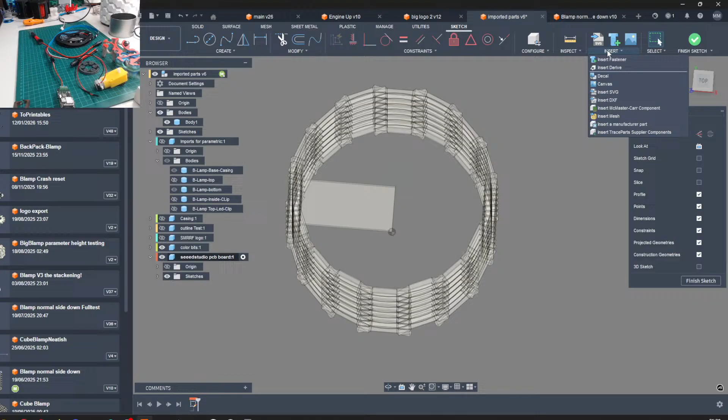Alright, I'm also trying to do multicolor here, so we can also work on that one. But for now, I want that one, insert, color bits off, body one off, insert canvas, insert from computer.

Where's the picture? I really need to order this. There we go, open. Cool, alright, there we have that one. Let's see - sorry, chat was gone. Alright, so we got the picture.

Let's measure it up with the millimeter and just roughly write it out. Perfect 25 - oh, I love when those numbers are great. Okay, so we have a sketch.

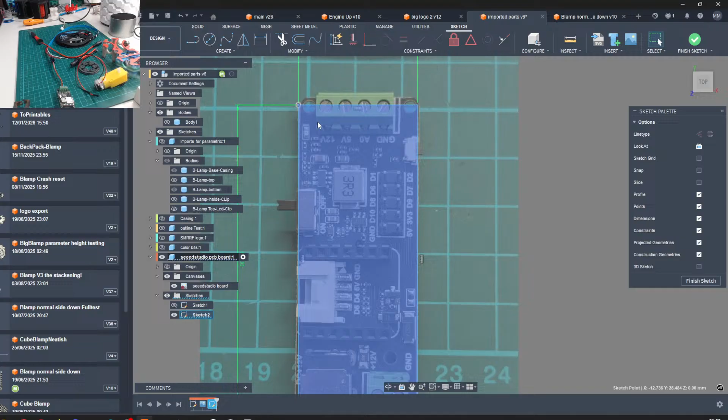And this is 5. Five on the right, so this one and this one needs to be 5, because there's a small spacing there, so measure that one out.

So at least we got this one working, so we do 1mm thickness. Oh, it's 1.6, not 1mm. Okay, 1.6.

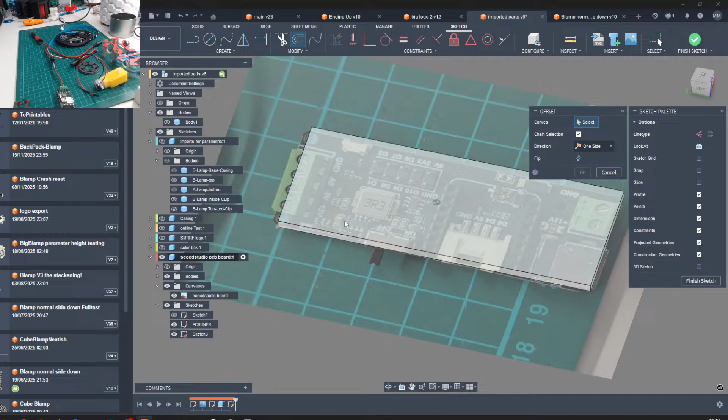PCB. Oh, my tab was on. Okay, why can I select that one and not that one? Wait, I said project, not offset. Whoop. Hello?

There we go. That's number 1. Cool. Next one, that is kind of what I want. Small button.

Because that's the reset. So that is 478, 4.78, and the thickness plus minus 355, 3.55. Then 8.22, .22.

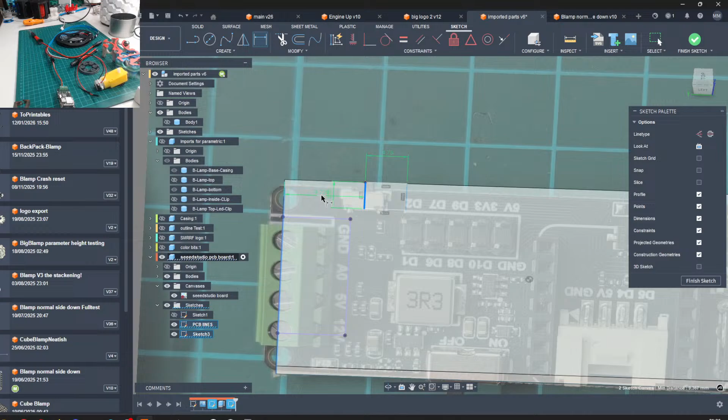Gonna check the height. 1936. 1936. And it feels correct. There we go.

Height we'll do later. Then this one gets a cutout, so for this and this, and then the top here, oh, that's the other chip. I forgot to take the other chip. Oh, and I forgot my camera. Beep. Sorry.

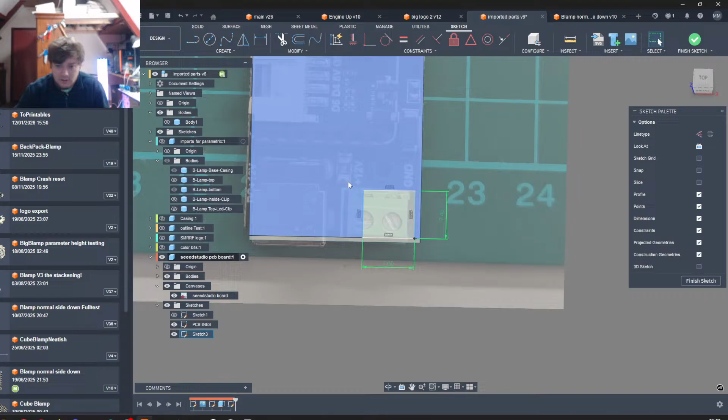Literal distance off the wall. 2. All right. Ten point one, 10.1, and the height of this whole block is 11.6. Oh, I love rounded numbers. 11.6. And now we just need 2.09, 2.09.

Cool. That's the important bits that I just want, so I know I can model around there. So that's the part I want there. That's the part I want there. Right? Yes, yes, yes, yes, yes. Oh, there we go. All right.

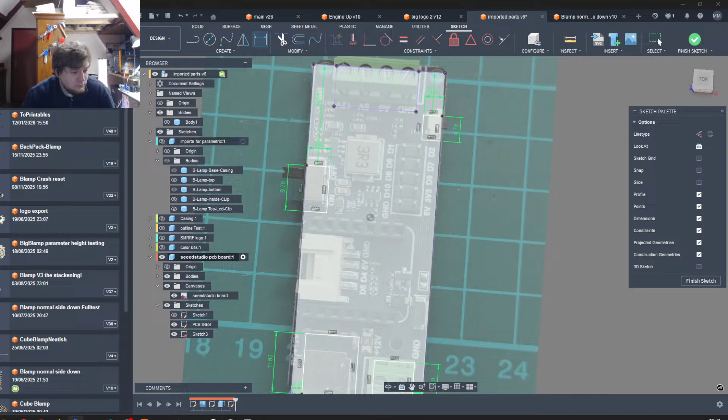All right, height. Eight point seven. Why are you freezing? Just press escape. 8.7. Back.

That doesn't have a flat surface there, so let's check here. Yep, that's better. .4, 4.47. Check this over there. This is the same as that one. This one is slightly different. So let's cross that one out. .12.

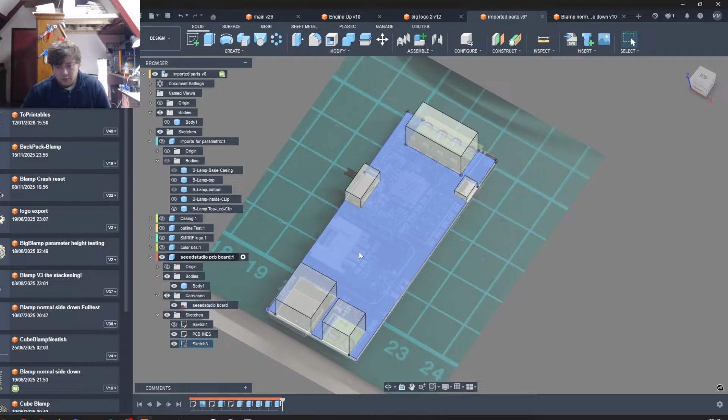Alright, so now we have 18,112. Wrong one. 18.12. And the height with this thing is 18.2.

But that's a square. Oh, that completely didn't feel like a square. That did not feel square at all. But it's a square, like it's both 18.2, 18.2. I did not bloody expect that one. I did not expect that one.

14.3, 14.3. Cool, now the thickness of this. 2.4. So offset, no selection please, minus 2.4. And offset minus 2.4.

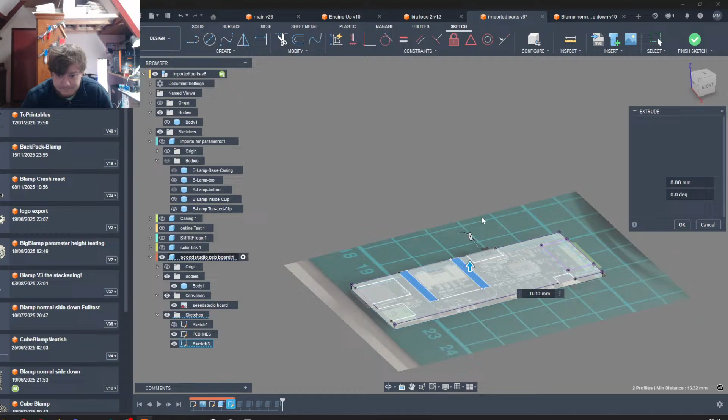Now we have that one. What's the height of these? 5.3. Cool. So this is the thing I need to put in, and I need the other chip on top. So the normal chip, which is this one, I need to unscrew it again. And I hope everyone is having a good day there.

Alright, so now we're gonna make the PC 60 board. Breakout board. Alright, yeah, it is a square. I really didn't think it was a square. Like, holy crap.

17 by 20. Wait. 17 by 21. Okay. Sketch this one, this one. And then 17 by 21.

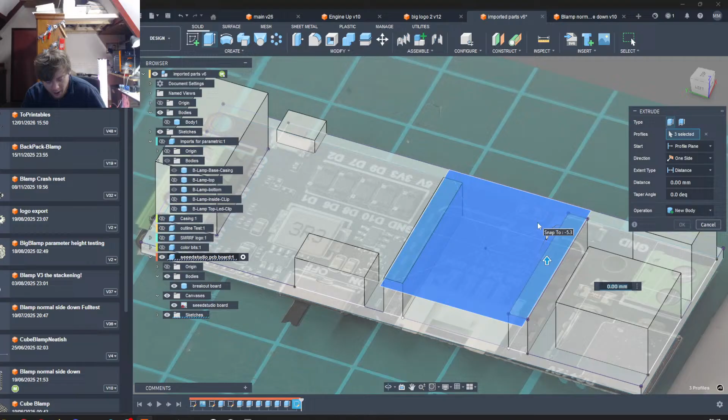6.3, 6.3. Yeah. At least we have a rough out. 7.3 from this point.

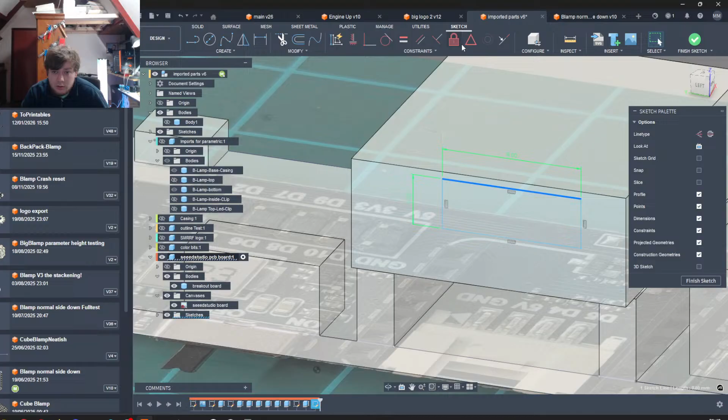Okay, now it needs to be 7, because then we can do this sketch here and make a small PCB stick out there. 9 in the center. Nine by thickness 3.2, 3.2. And then we can do this one to this one. There we go. Now we have 1.6.

Now this is the board we need, so that is good. And there we go. Alright, so we got that one in place, then we need the bottom.

We got the thing, so we can make there we go. Bottom new chip. Bottom new chip. We can do create a copy. Yeah, right, we need to line it up. Yeah, I fucked up there. Yeah, I shot it.

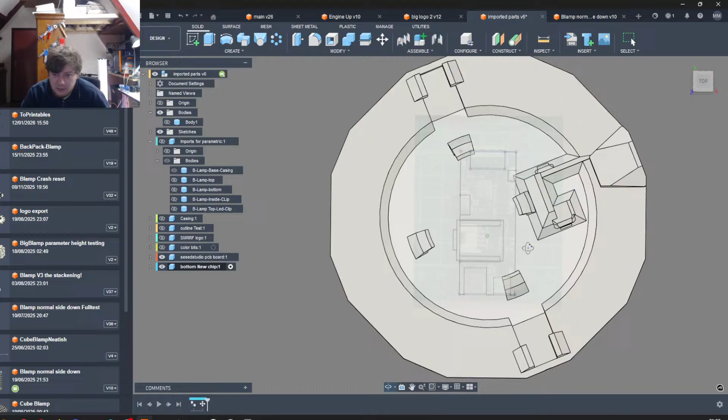Oh, right, we don't have to line it up, so it just needs to fit in here. Okay, I'm happy about that one. So I think I can make this thinner, but at the same time, I don't want to.

Alright, so first off, we're gonna clean this one up because this all here is not needed. I want to keep those 3, I will move them around, because then you can wrap the cables a little bit on the inside so it doesn't get stuck on the outside when you click it in. This is good, this is good, this is bad. So that can be gone completely. We're gonna redesign that, and with that we can adjust the top part too.

So hopefully the, right. Touch cable, and I will just measure that one up. So let's first make that one. Okay, where's that cable? Where's the cable? Not that one, this one. Because I still need to model this thing. I forgot that one.

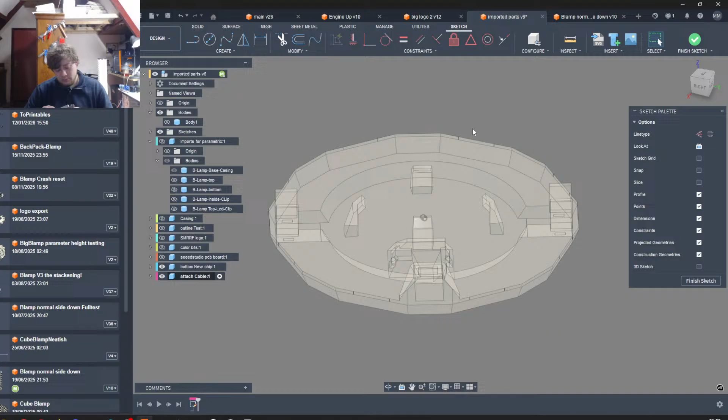So, okay, that's 11. You need to be, hey, hello, I said D. 11. And then how far are we going? 6.3 or 8.3.

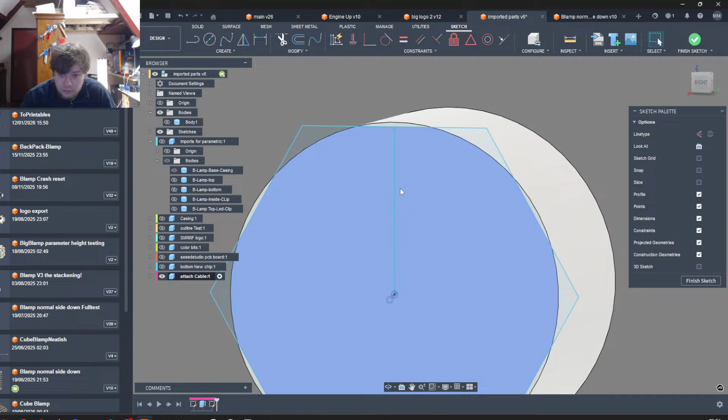Should be fine, we'll line it up when we need it. So that one, sketch here. 10.7. I don't think I have this one in shortcut, so I'll put it on. That should be correct. Yeah, that's yes. That's looking correct.

There we go. And that is going for 9.24, 9.24. Let's double check that I made it one body. Okay, yep.

Power input. Cold. Alright, there we go. That's the important part, the rest can be smaller. I'm not really happy that this doesn't really have much attachment. Yeah. Crap, so I need to lock it here and in the front, because this is not enough that it can be pulled out.

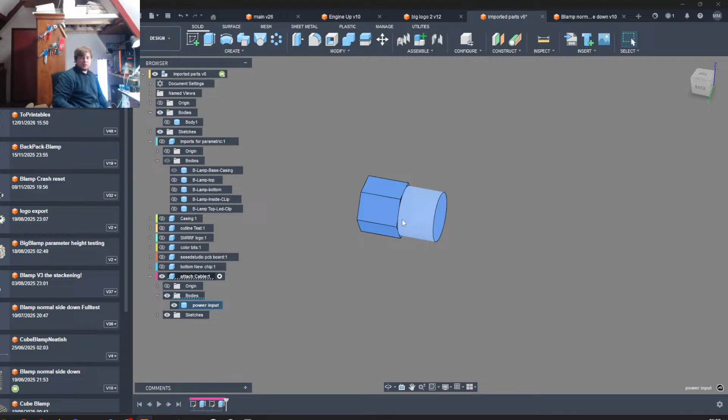Cool, at least that one is working. Yeah, I screwed up. Well, technically I screwed up, but like the point of the attachment is not that correct. So I need to look for something else, but for temporary I can use this. That should be fine, I just don't know how to hold it.

You need to make this so bloody tight. Okay. Okay, so we're gonna do that and that. So let's go for this. 2.9, and then it goes to 7.8. 2.8. And then it goes a little bit smaller.

Plus minus is correct. 8.2, okay, this is good enough. Then we need another 12. 12. This is the important part that we need to enclose.

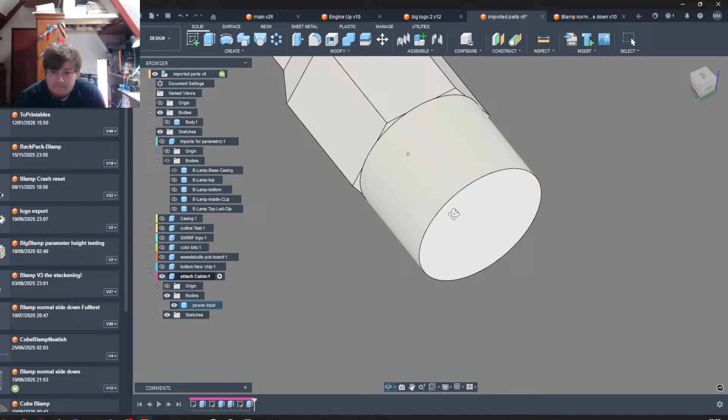This is way too big somehow. But we're getting there, we're getting there. Okay, so now we can get that one back. We can go now into jumping that one. We can disable that one and start cleaning this one up. Okay, how can I make a click system with something that can go back and that can go out again when it's stuck?

Yeah, I didn't think about this properly. Like, it's too small, there's no surface. Like, if you put something in, you pull it out, this whole thing just goes with it. There's no way to fix that without screws, and I don't want to implant screws because then you need to buy 2 screws, which...

Oh. Damn it, okay, I need to leave that and focus on the chip itself, so I'm gonna leave that one as placeholder, but this all needs to be gone. So let's start cleaning up. So this one, then we need to press this one, this one.

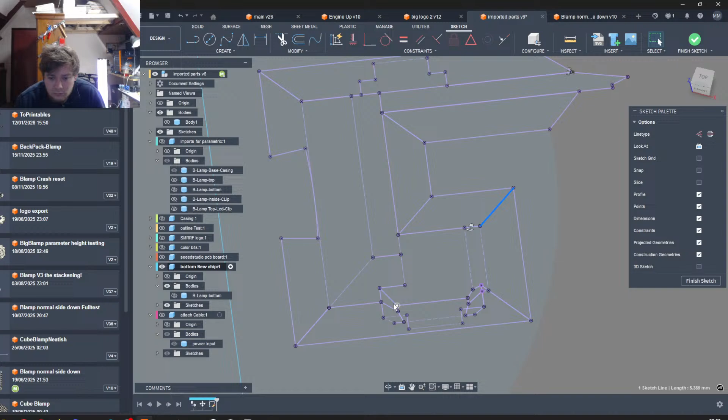The body for now so we can click things easier. Okay, so let's get the body there. Right. There we go. Now, come on. That's fine, that's fine, okay, that should be fine. Cool, okay, yeah, nope.

Get the body back. There's at least half of it going. That one.

Okay, this one needs to be deleted. Like it said, but it should be okay.

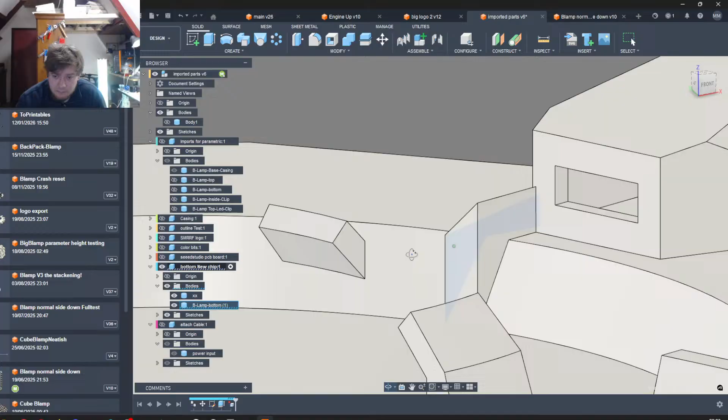Better, and you can be gone, because then we can bring the chip back to this.

Okay, so this one needs to be tightly centered, and then the cable sticks out there, plus minus. So the power cable will sit here. It can be a very short one, or we do a long roundabout. So I think this is better over here, because then you can do the cable okay, there.

Okay, so that's that one. Then we have attach cable. And then we have this one. See, this is

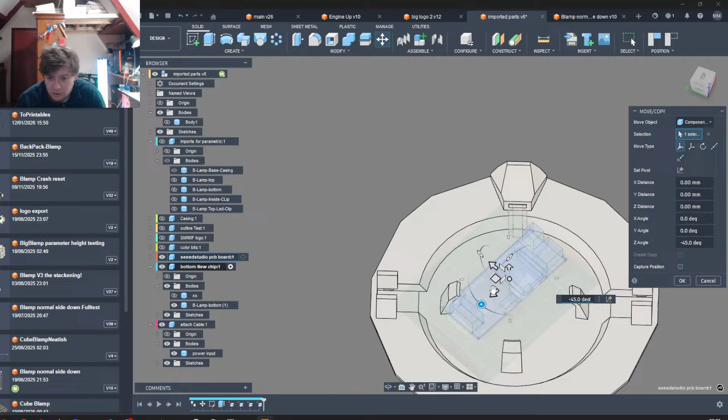okay, so this is why I make the studio put the modeling parts, because then we can actually turn things around, make it workable. So we can put this one dead center.

Cables go out here, the LED strip cables. Power cables go here, so we can go around. Otherwise, you need to go a little bit short in here and then just go over it. That gives it a little bit more space, because then that one.

Okay, so this one can be angled like that. Oh, that's neat.

Okay, so we have that one attached. This one. Attach cable go in here. So you.

Okay, so this one sticks out here. That one can be inverted into.

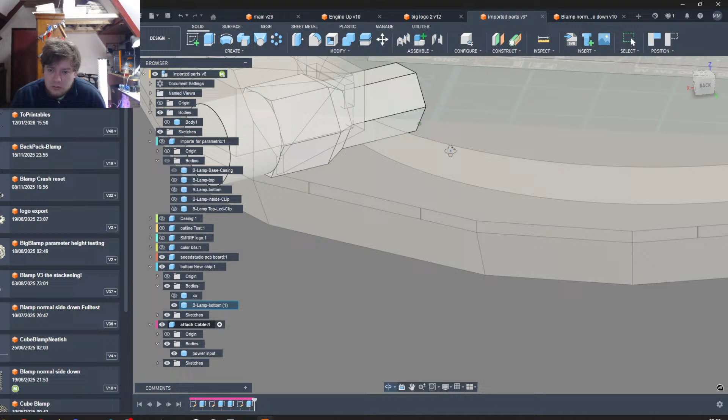If it is this thing and I get a new one that is slightly a different situation, but it's the same thickness, I can put it a little bit lower. And then I have less modifications on the top, and I can make an insert clip that you put in here that hopefully clamps it in place.

Yeah, I think I can work with that. Let's make it, modify it.

Okay, so first of all, let's get back to the bottom chip. Make a sketch on

capture position, please. Let's put that one on the top. Alright, so get to the bottom chip. I want to have a sketch here, and that I can at least see this one and this one.

Because that's the clip space, so we can make an attachment. So first you clip it in, then you put the clip. So if

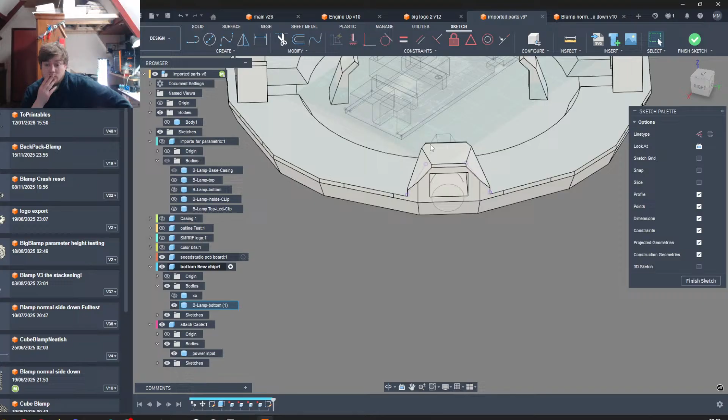Yeah, okay. I can focus on this one later, but first this one. Okay, you can go down, grab, Seeed Studio board, and the casing can go off.

And let's move you a lot down, so this one. .6 down, okay. Negative 6.5. 6.

Oh, that seats nicely low indeed, so I can move that a little bit that direction. Okay. It is nice and low, not in the cables of the connection pieces for the LED strip, so I dig that.

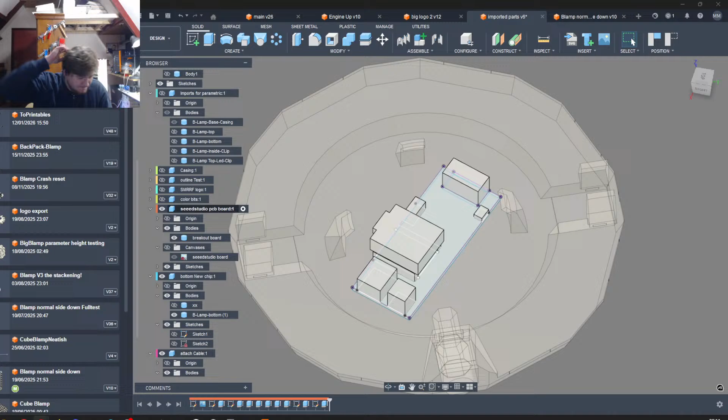Let's do that. So this is really small, of course. This is too small, I cannot measure that. I can measure this.

Two. Okay, there are 2 holes over there and over there, so I can go to chip. Okay. Capture precision points. And then project just the outlines, please.

Oh, and we can do a small prototype for the lining up, because I want to use those small holes here for the center alignment. So you can click it in, then put a plastic piece on top, which puts this one on.

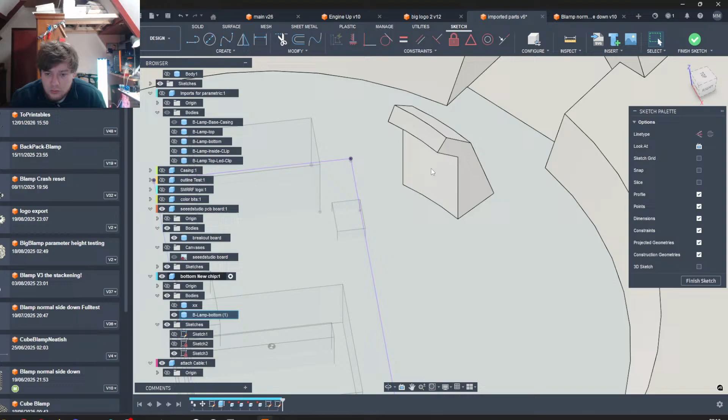Okay, I need to move this one. Cancel, I'm not in a sketch, finish sketch. Not the best way to do it, but yeah. Okay, works, nice.

Okay, I'll at least have space here to do that. And we still have cables, we have cables, cable space sticking out, so that should be good.

We have the reset button over there, which we can reach, the power button there, so I can make a small clip here that attaches it, and ooh, I do not want to touch that one.

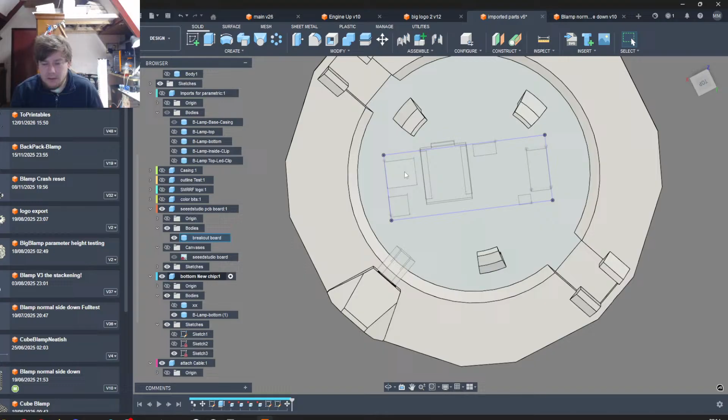Yeah. Okay, let's get the holes there. So 2.

But oh, here's the hardest part. Okay, I need to. Okay, that is 1 by 1. So this one.

This one, one by one.

Oh, right, it's rounded off. Should be fine, right? Yeah, okay, should be fine.

So small pins, and then the same here. That is easy, copyable like that. So we're just gonna do a quick sketch of this one. Mirror, select line, go.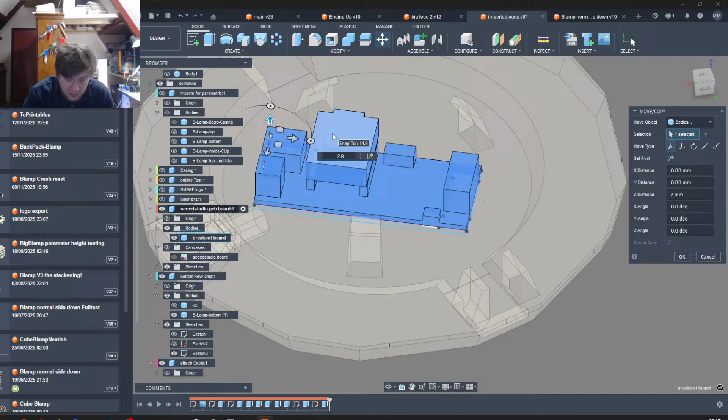Point 8. We have some small soldering pins in here which I almost didn't include in the sketch because I didn't think about that one. But now we have that spacing at least, we get that one.

That gives the freedom, so if we get this one somehow in place, that's the same length. 4.15.

And the CCU board can go off for now. Let me go to the bottom clip again. Go into this one. And this 2. Oh, this is gonna be hell.

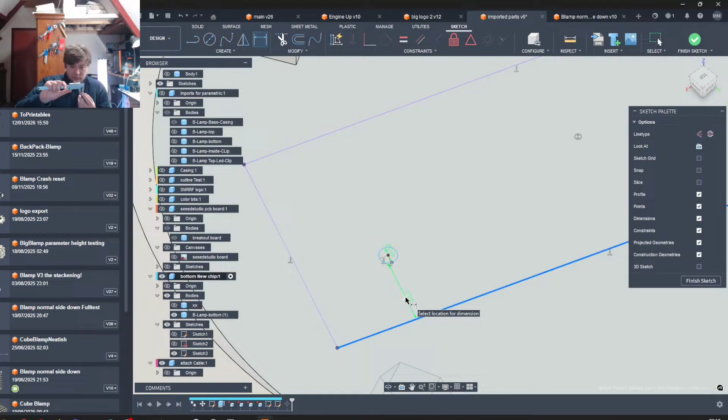Okay, you and you, double check. 4.2. Nope, 4.2.

And then 9.5. And if we get the Seeed Studio one back, feels okay. Okay.

Cool, okay, then the big circle is there and there. So how much is this? This is 0.9, okay. So you have an offset of 0.9.

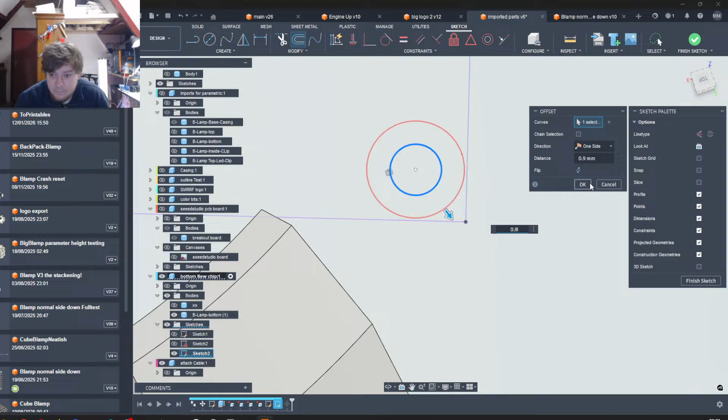So let's make a quick one, so this one, this one. Let's see how much height do we want, aiming it. 4.5, not 5.5, thank you.

Oh, right. Yeah, let's make it new for now. Let's get the sketch back. Tree on the bottom needs to be gone. Minus 1, join.

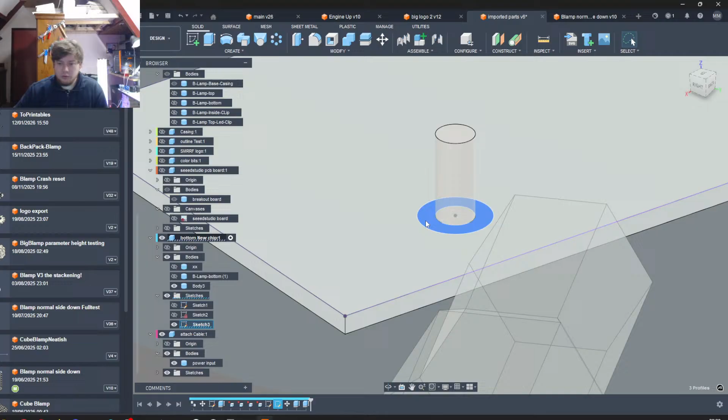Okay, so this was plus minus, let's get it out. 2.2, so 2.1. So this is where you put it in, at least. That's the thing I want, so.

Let's start up the printer, and I need to swap plastic for that. Do I have leftover plastic I can use? Yes, right. So let's do unload, because this small leftover is probably enough, but I don't want to use it. So let's unload that one. There we go.

Test plastic. Come on, go in. There we go.

All right, let's see how we get that one in place. Okay, waiting on the temperature. We can go back to the model. I don't want to do the whole thing yet, or do I want that? I have 3 boards that I can test it with, so if all this connects up, that is fine.

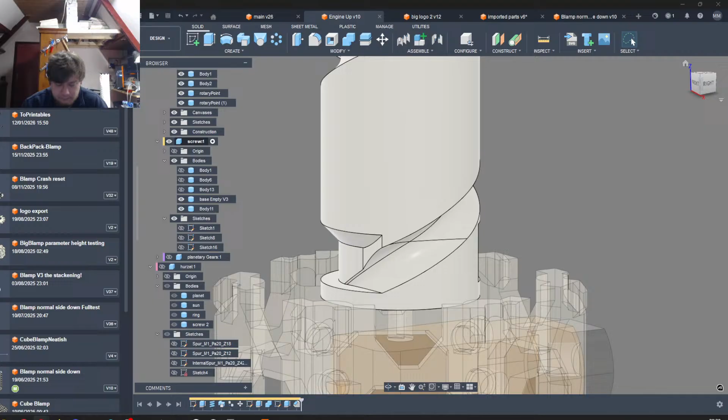Too much, because this is just too heavy. This one and this one is 7 millimeters distance, and I want around 12.

So this is gonna be a different one. Okay, let's do, you gone, and you will be gone too. Because this needs to be there, and this part needs to go. Oh, I can do that. Okay, now I have a good understanding what to do.

So you, I know chamfer's gonna chamfer. Are gonna be 11. And then you are also stuck there, which is fine.

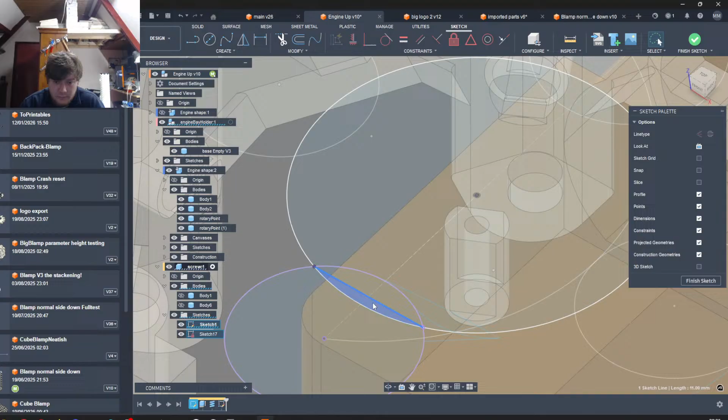You still need to be there. You can be gone. Then we can do that small curve. Okay, I don't want to, so the marble spacing is here. This is too much, so I can go a lot closer. So bringing this sketch in.

Let's make this 6, because then we just make it a lot smaller. Fuck yeah! And then we do this cutout. Right.

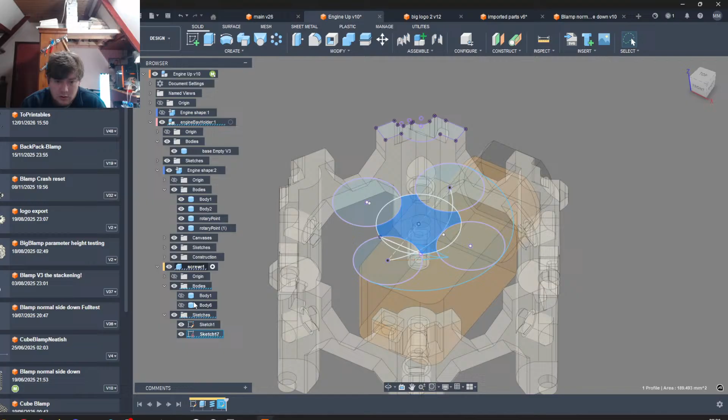No, screwing up here. Yeah, that is fine. So this goes up by that one. Then we say sweep, select path, select guide surface.

Huh? The fuck? That's not what it should be. I'm confused.

There's a little bit weird, it's not doing the shroud. It's just... so I think I need to do it like this and then cut it out, but that was confusing. So get that one, select guide surface, select.

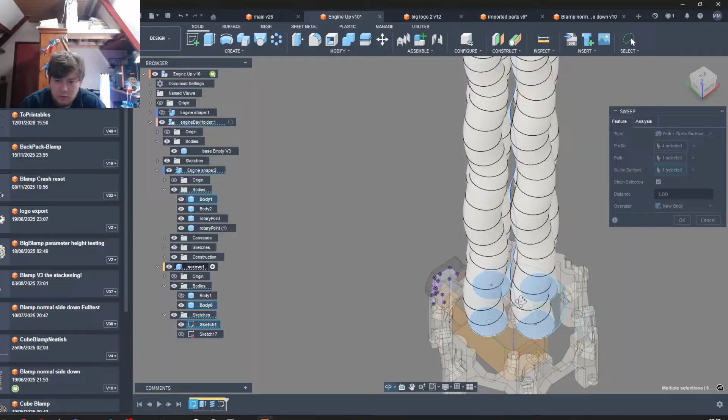What? I'm so confused. I screwed up, I should not have deleted that, huh? Okay, this should go around.

That's even weirder. Yeah, like there's also a small cutout here, which is that one. That's fine. Okay, the last time I did this, it rolled around like doing actually that. So I'm...

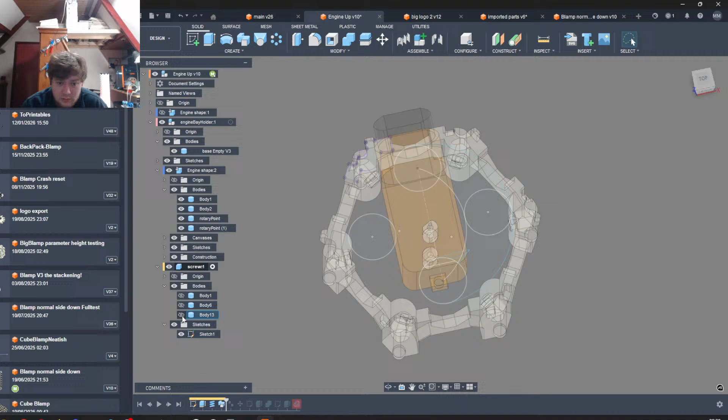Okay, well, I was like, oh, we can fix this, but somehow. See, this is what it should be. So, what did I fuck up here?

Path and guide surface. Is it literally just... is it maybe because I selected that flat plane and that plane is not flat? Oh, I'm... okay, that's the only thing I can find.

Nope, okay, finish sketch. Alright, you...

How's your day going, man?

Yeah, like, is it the distance? It should not be distance related, right? It should not be distance related. It should definitely not be distance related. So finish sketch, we have to screw.

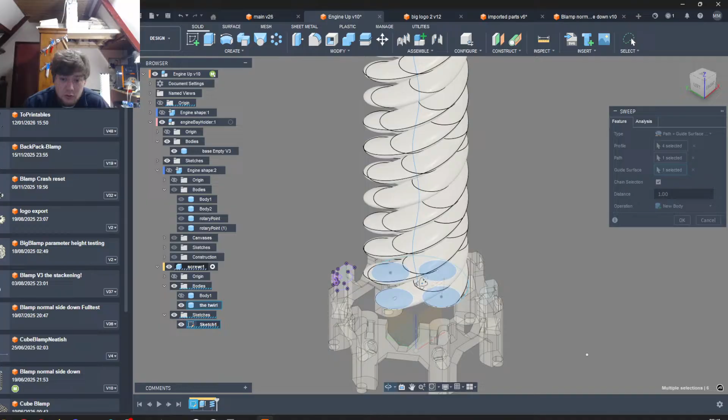Control, let's see. Alright, so sweep, select, and then guide surface. Okay, so, oh wow, okay, so we grab the surface plane and then it's fine.

I thought that, so the engine shape, this is flat too. So it really depends what you select. I thought it's the same surface space. It's flat, and that small thing is flat too, but different.

But okay, so this one makes it go correct. Right, so if this one works, then we can cancel this one and just do that. So we can go here.

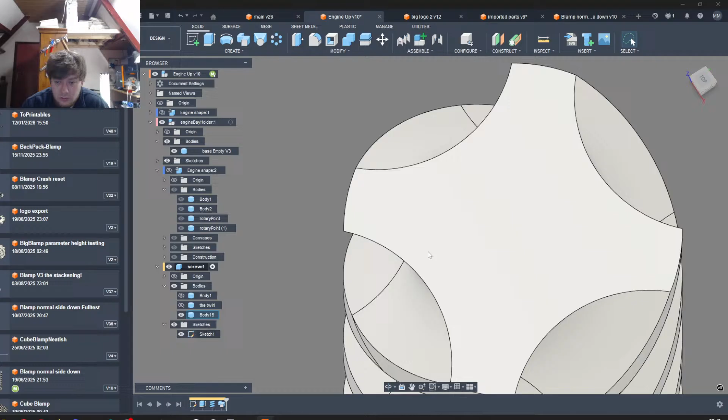One, two, three, I don't need 4. I need 3, god damn it. Okay. 3, please. Oh, is this still centered? Still centered, okay, yeah, still centered. Okay, cool.

Because there are 3 places where the ball can go in, and there are 3 places where the ball can go out. So this shape should be fine, and print is done.

Oh, that looks so tiny. Let's cool it down, because the small template I printed is not allowed to warp. But yeah.

Oh. We made a small mistake here.

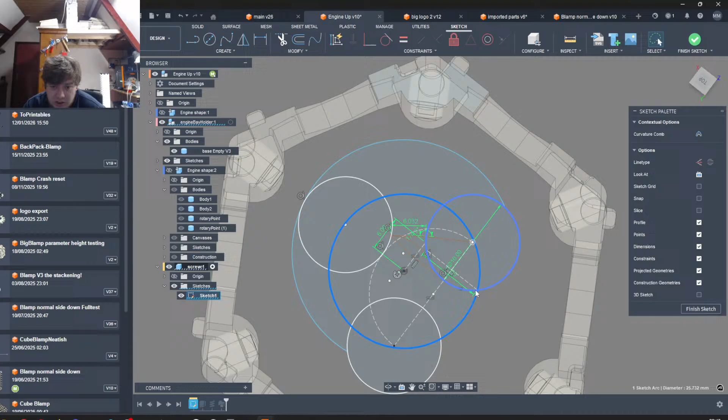Okay, it's all centered. Yes, but this one is no longer correct. Yeah, I went from 4 to 3 and it messed things up. Things were white, but not correctly white.

Yay. Is this selection? No. Okay, alright.

So you need to be 11. Center point to this one. So that is 11, that is lined up. Okay.

Everything here looks the same. 14.5. 14.6, that is the same. I think everything lines up. And nope, something is not correct. Okay, I messed up. So why is this one and this one not correct?

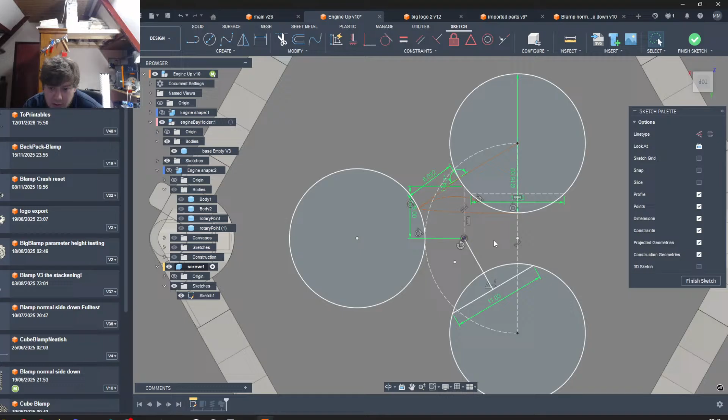Yeah, right. You should be here. There we go. Okay, now it's better. So now we can do this lineup. Now it's correct. Okay, I was doing that wrong.

Oh, neat. It knew which plane to pick. Nice. Okay, so that feels a lot better. And because it's 3, we can go a little bit lower. But this should grab the marble at least, to do the thing that I wanted to do.

And then we can do that one, right? So in the sense, okay, so now we need, because I have, if we look at the base of this, we now have made these 2 positions, hopefully. Now we still need this one. And then the end point of...

Doing something like this, I'm gonna do a different way. Definitely gonna do a different way. And do that. And the stabilizer, which is gonna do the same thing. So we got the top, we need center points.

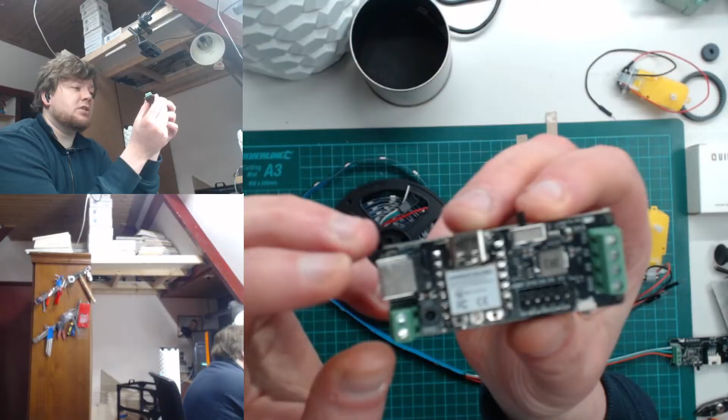So this is the piece where you place it in, so the small 3 points in the seam is probably never correct. But I know those holes are always exact. The outside has some small burr edges, which most people can chip off, but if you don't, this at least keeps it in place. And plastic wise, if it zooms in, it should be thick enough.

Oh, wait a minute. Oh. Oh, this one worked. Oh yeah, I messed up there. So, I'm surprised that the measurements are actually correct. Like...

Now we need a small point here on the same level as that, and then it lines up. So there is space under it for heat buildup so that it can go away and it doesn't sit on the plastic itself.

One, I don't have screws. Two, the client doesn't have screws, so currently not doing that. So I'm still trying my best to have at least cut parts down. I know I can just use screws, but then I need to add to the bill of material. Yeah, no, I know, I'm trying my best to get the bill of material as low as possible and have everything work with plastic.

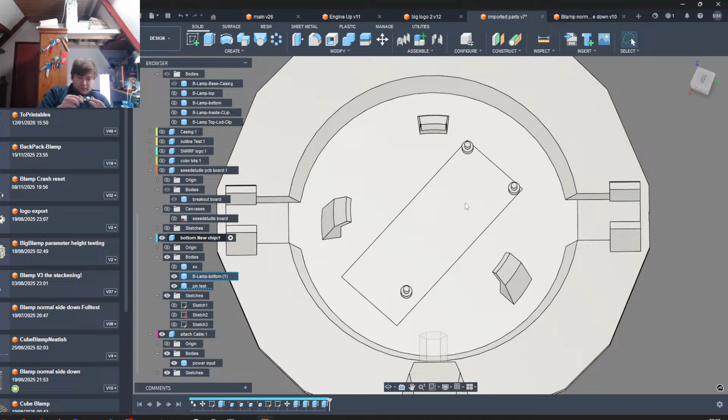Okay, first of all, let's remove you again. Let's make a small edge in here. Removed from that, so let's see how big this can be.

Point 3. Let's make an extra sketch here. Hello? Wait, damn it, okay. 1.3.

Go for 3. And then you and you.

That is lined up, so we have a small cube of space here. That actually does that, and later we can extend it to the outside and make that part correct. So at least it has 4 points where it rests, and not currently just 3 points where it just wiggles.

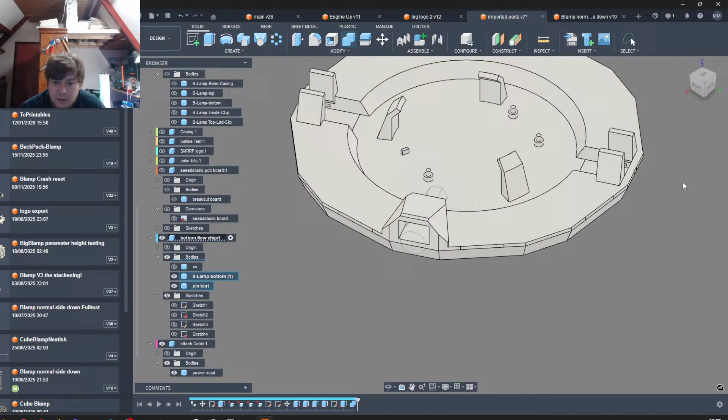And we can do that, so we can bring this one back and say this one and this one. No, I said add, okay. And you can be press pulled this way, so it is a little bit easier to print. This one is a little bit harder to print because I don't want to extend too much. There's a lot of space, but I don't want to do that there.

Okay, so the main chip gets hot. This probably gets hot because 12 volt goes in.

Where do we want to place the clippies? What's a good spot? I only see the reset button, which I'm not that happy to have hidden.

Let's think, because if we do it - okay, let's do it from that direction. And do that, so I want a clip like that and I want a clip like that.

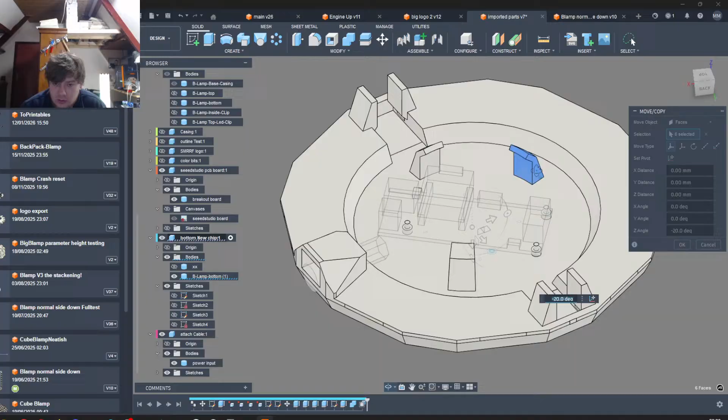Then we have space for this clip here. Oh, I don't have space here. Okay, you go over there. You go over there, okay.

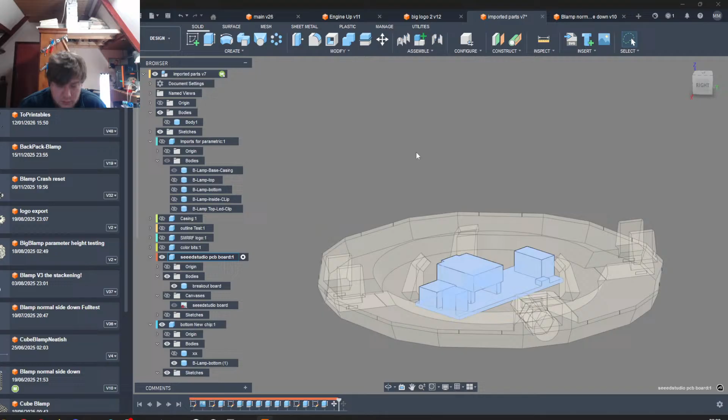This one now. It should work. Boo, boo, boo, boo, boo, boo, boo.

Oh wait, where is... Test is here. I'll screw this one up. Station, stop twerping.

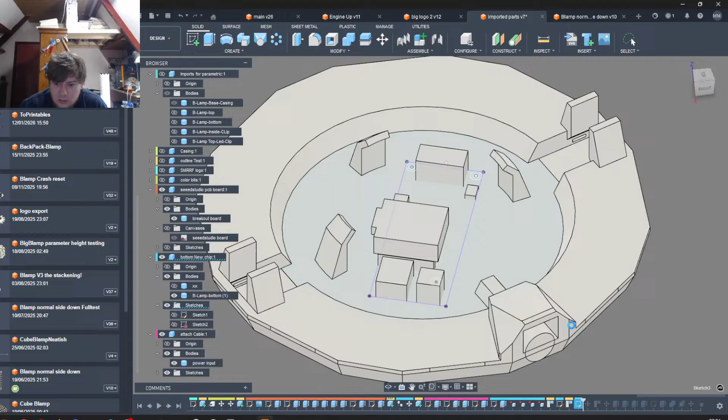That should be that, so I moved here. That should work. Timing. There we go, okay, so turned it after, and now it's lined up again, so that should be fine.

And Fusion is gonna crash because I'm not the best with that.

Cool, so now we have at least 2 lines here, we have space here now, we have space here now. So at least we can make that compatible. We can get the wires in, out, everywhere. We can go around here, we can do this one around here, and at least hold them in place by this, so the cables stay in the center and not go to the outside. Which is great, which is great.

Right, yes, I need to check my sugar. Yeah, Cannon Shooter, if you're still here, how was your day going?

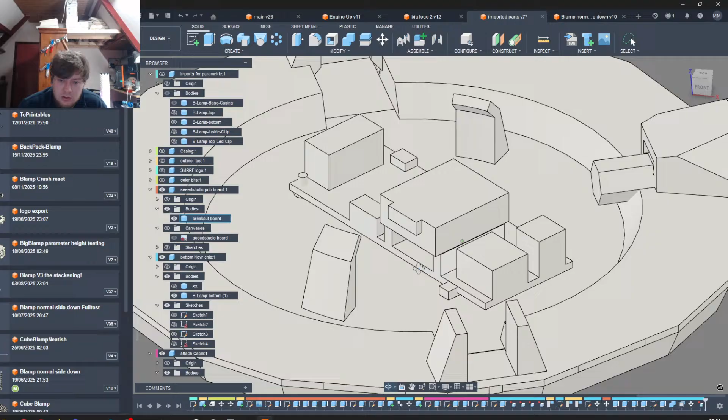I'm busy with this, so this one is in place, that one's in place. So I can make a small bridge over this one and over this one. Cool.

Yeah, okay, so now I can do that. Wrong component.

Really? Now you're gonna crash on all the things now? Thank you.

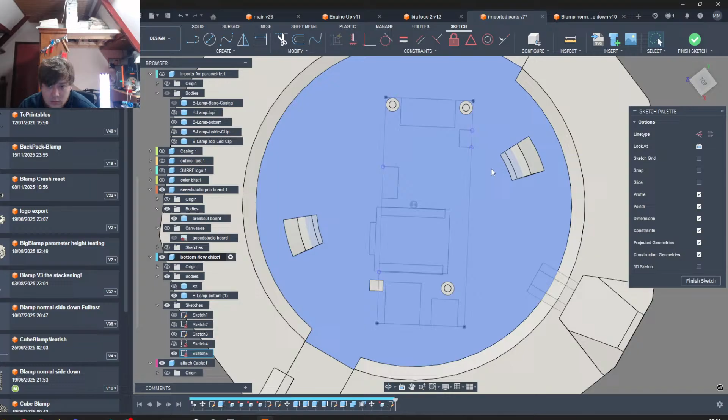Alright, let's first project this one and this one, this one and this one. And an offset of 0.2. Now we can work on that line, so we can make a click system in here and a click system in here, and just do that.

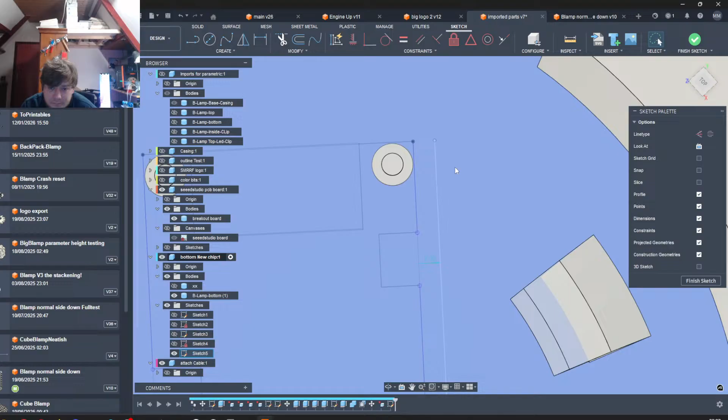Let's get the thickness of this, so we can go over the screws. That's 5. That is 1.3 off. 1.3. And then 5.

That is the system, so that is the line out that I want. That's the thickness, so we need to make a U shape around it. So this needs to be 2. This needs to be 2. And this.

Equal, please. Cool, because I don't know the height of this one yet. This is gonna be 3. This to this, this and this, and let's make it 3 too.

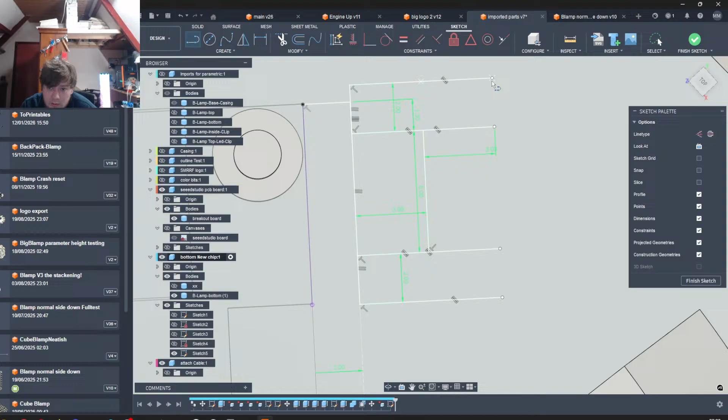Can make that U-shapes, click it in, do the same over there, and do the same over there, yes. New body for now. Okay, you get a chamfer, small one. That is fine. Then you

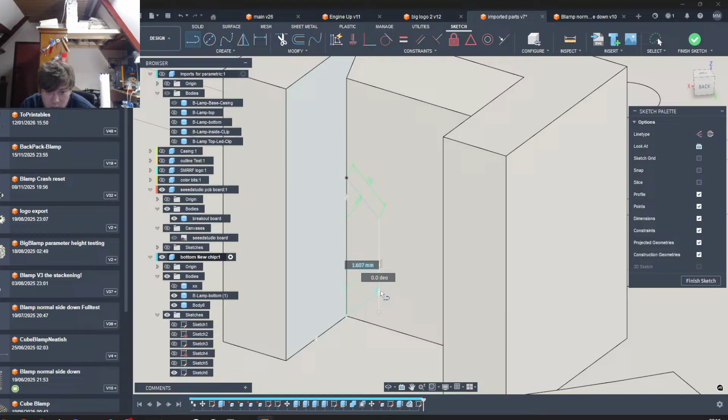Let's make this 40 because then the printing angle is a little easier. And you are 2.5. A little bit more plastic, just easier to print. Okay.

You and you. Mid-plane, please. Thank you. And you. Mid-plane, please. Now we say mirror, select objects, select plane, and again.

That should be plus minus correct. This is fine.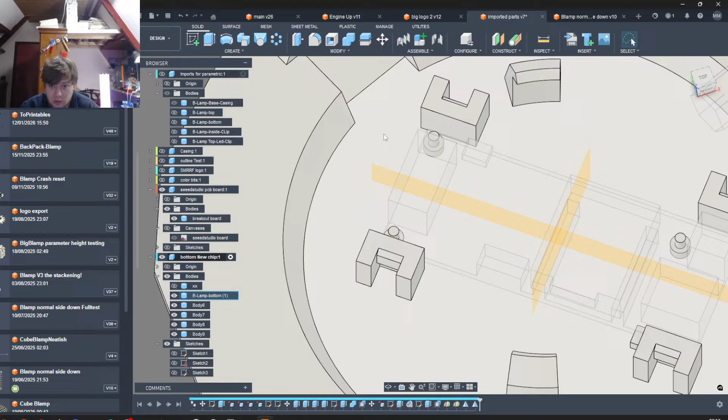Reset button is slowly sticking out, so this one, minus 1. Ew, no. Extrude minus 1. Yeah, okay, so this one is going to be a little bit smaller because there is a reset button here sticking out. I just want to be careful that by testing I could probably make it bigger, but I don't want to make it too big.

Chip is still here, chip is still fine, cables are not sticking out. Yeah, should be fine. Alright, so now we're gonna do this one and make a sketch. Project this one. And project this one.

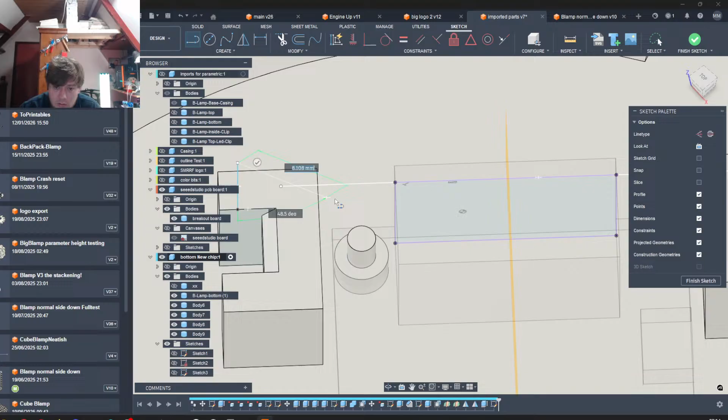At least. Then we don't want to go too thick, so that is this one goes into there. This one. Let's go. Few millimeter thickness, that gives you a click, so 2 should be there.

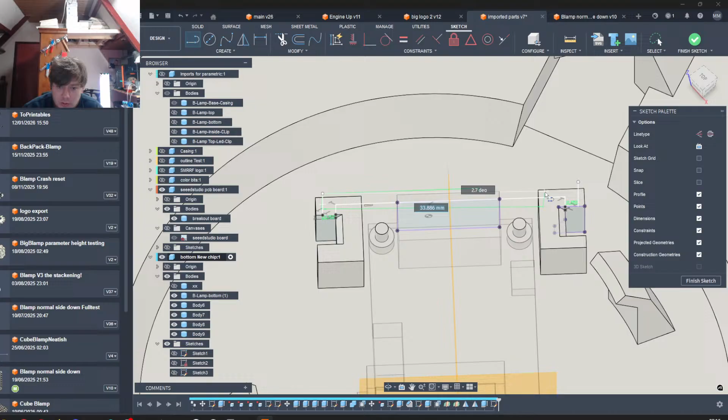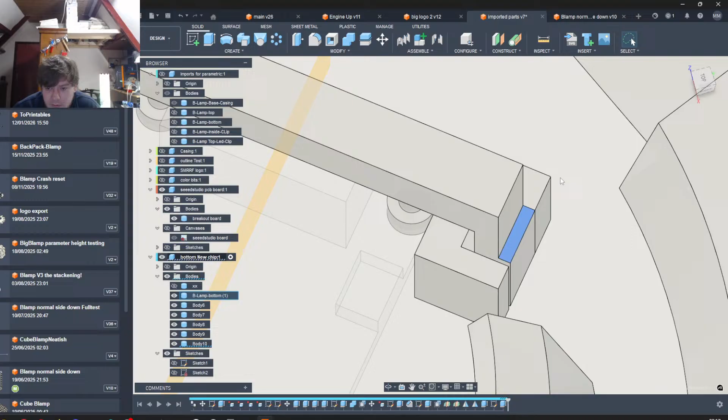This should be that. And now we give it 4.7. And we say new body. Let's. Oh, come on, you can do it. Yeah, there we go. Should be fine. Nope.

As the height is the same on those parts, this all should be the same. Nice, okay, copy made. So now I can do this one. 1, 2, 3, 4, I have no clue why that one is there. So this one is this, and this.

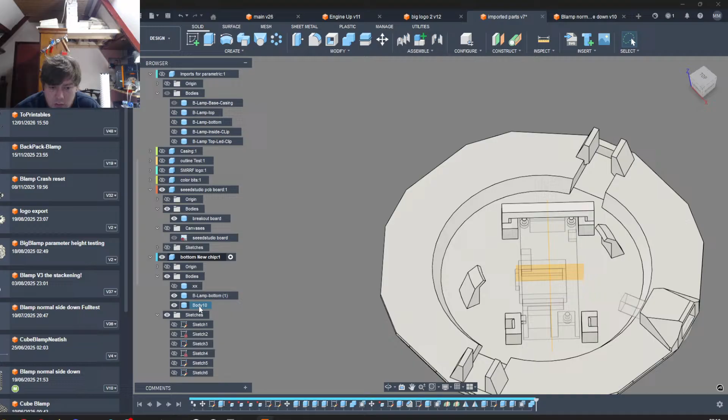Okay, and now I can do that. So now I can do PCB board clip. That's one part, copy that 2 times, and then now bottom needs a special one. I don't want to print everything yet.

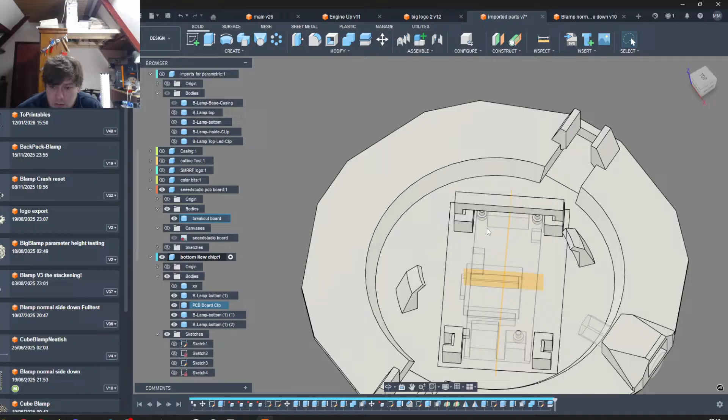Okay, then we go back to untitled. Let's see if this one works. Copy the bottom and D. I selected the wrong one. Derp. That's the one I wanted to do. Derp, I selected the wrong one. Okay, so that one and clip.

You can be gone, you can be flat. And you needs to be that. I select this, there we go. Okay, so that's a new print, a little bit more strength. I don't know the height yet because I don't have that physically properly printed, so yay. And this is now all correct.

Alright, that's a 24-minute print, yeah. Should be fine. Can I print? That is empty, right? Cool. Confirm.

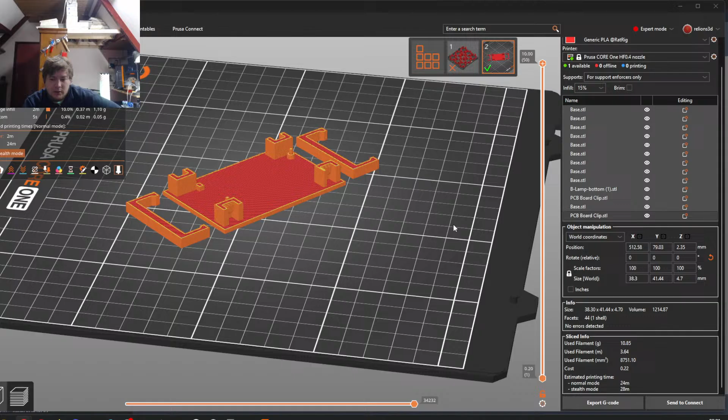Yeah, this was some good progress. So I will check the height. I don't think the height is that correct, but I can scale up this small piece at least and fine-tune that because I'm not sure yet.

Oh yeah, I should have made a chamfer here. Should have made a small chamfer here too. Forgot that one, so let's fix that. Let's do that. And off the sketch. Cut out. That. Should be fine.

Alright, that's better, because then when you click it in, it just does that wiggle, and it's the small details, and that makes me happy.